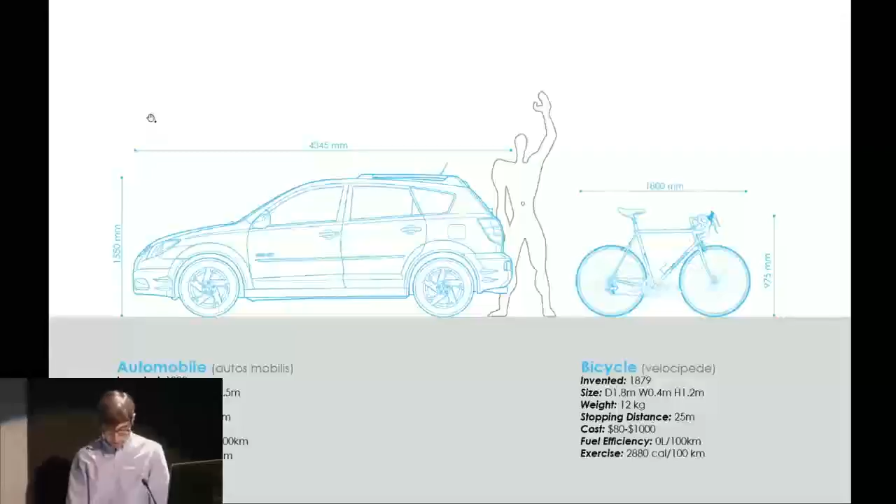The bicycle holds great potential in cities like Toronto, where it currently holds only 1 to 2% of the transportation modal share. Cycling eases traffic congestion, reduces pollution, promotes an active lifestyle, and contributes to a more vibrant civic life, all while being a fast way to navigate the dense urban environment.

A surge in interest in cycling has spread across the globe quickly in recent years as people begin to acknowledge the many benefits that cycling can bring to urbanites. Despite this growing excitement, an ingrained bias towards the automobile in North American planning has created an attitude which resists a cycling culture.

Political policy changes clearly reveal the potential for the bicycle. The massive population growth in the Greater Toronto Region has caused serious transportation troubles. In order to promote a more sustainable lifestyle, the government has developed a long-term strategy for the future of urban development and transportation.

Examining Toronto Council's strategic plan, the City of Toronto's official plan, as well as the Government of Ontario's Places to Grow Act, reveal an emphasis on densification and intensification in order to reduce commute times and curb sprawl. This more compact lifestyle lends itself perfectly to bicycle-based transportation.

The Big Move, published by Metrolinx in 2008, emphasizes the need for a multimodal transportation system, where the bicycle can pick up a much larger percentage of the trips within the urban core. The alignment of the bicycle's qualities with the region's long-term vision provides great motivation for actively and aggressively promoting its use.

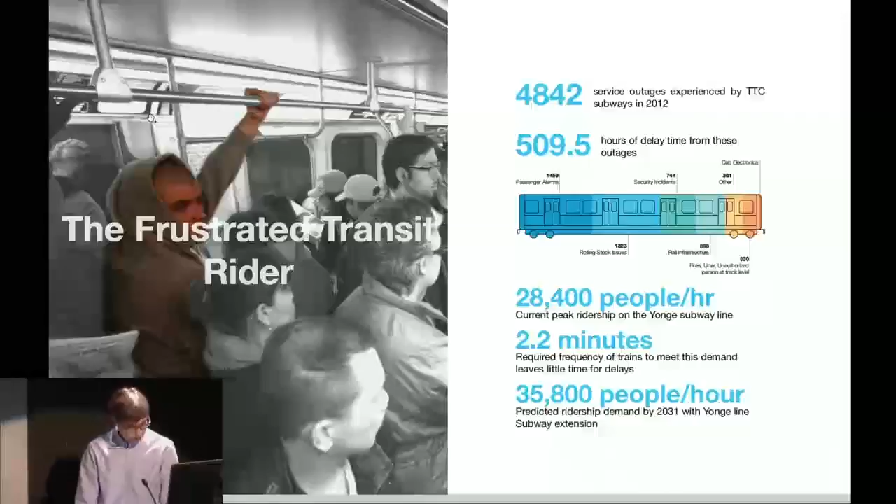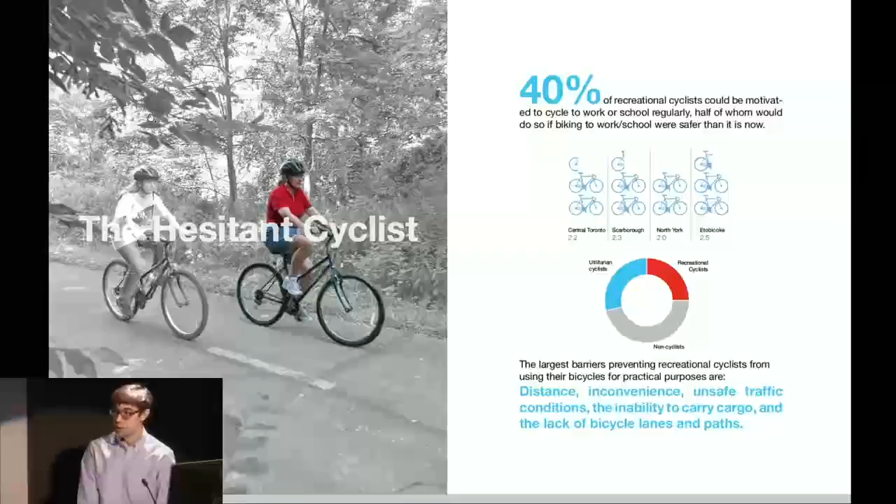The frustrated driver loses 170 hours per year to traffic congestion. The frustrated transit rider is faced with a delay-prone system that can hardly keep up with rush hour demands. The hesitant cyclist feels that commuter cycling is far too dangerous on streets filled with fast-moving traffic. And finally, the long-distance commuter is often left at Union Station far from their final destination.

Building a strong cycling culture involves a multifaceted approach which addresses infrastructure, policy, and cultural perception. In order to draw the frustrated commuter to the bicycle, city officials must target strategies which make cycling appealing to the average person. I have found 3 key motivating factors for enticing the potential cyclist: safety, convenience, and experience. These motivating factors are fundamental in analyzing the success of cycling projects and the design of new cycling infrastructures.

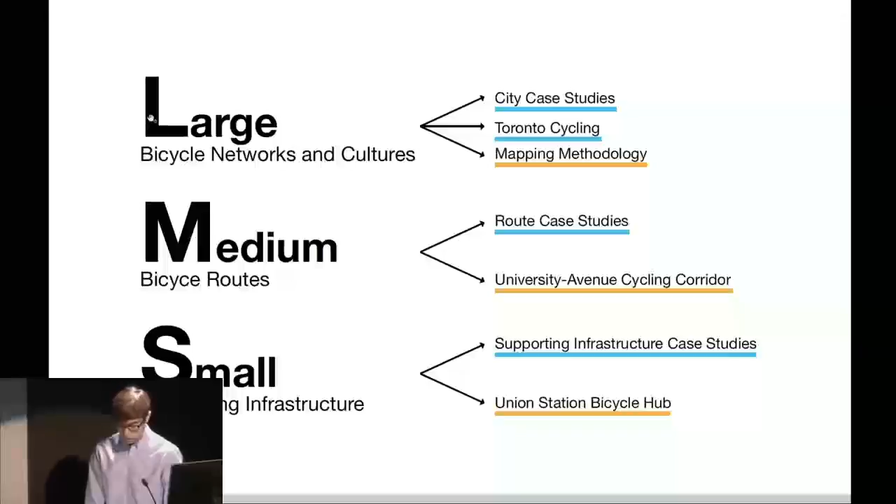Through this presentation, I will take you through an investigation of urban cycling at 3 different scales. An analysis of precedents at each scale is used to develop a design strategy for generating a cycling culture in Toronto, beginning with a mapping analysis methodology, then proposing a new cycling catalyst corridor, and finally a new vision for a multimodal bicycle hub at Toronto's Union Station.

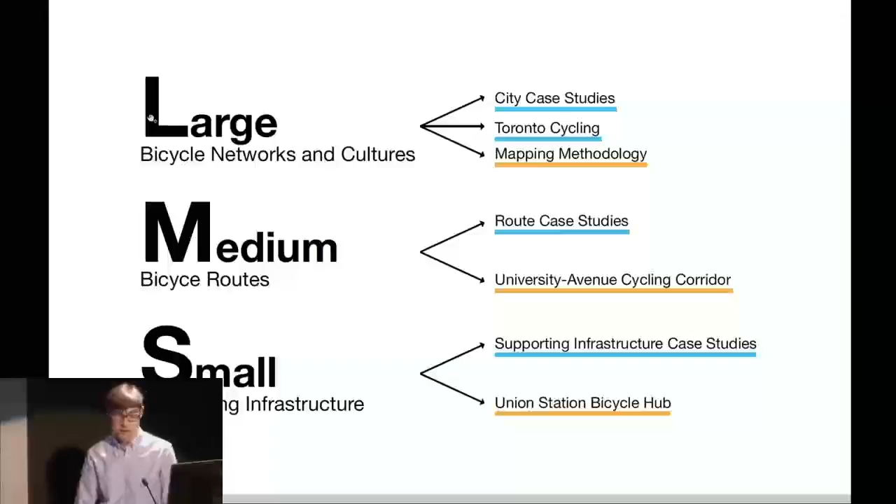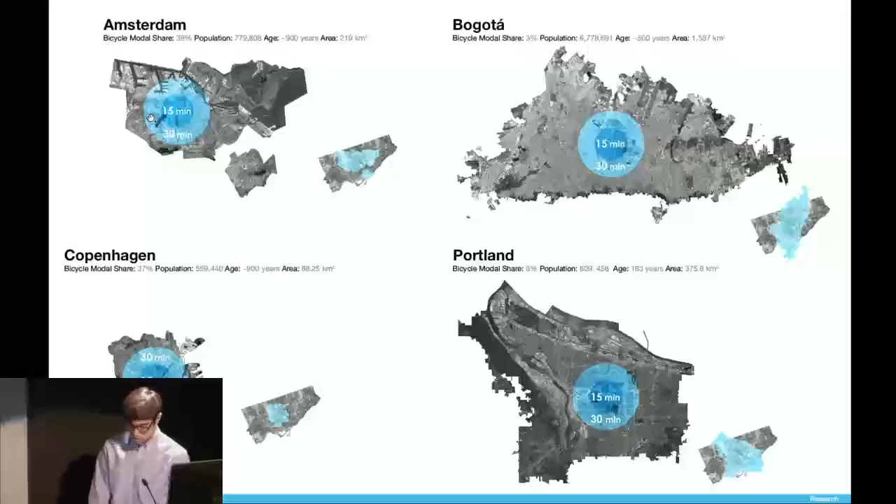We begin at the largest scale by examining bicycle cultures and networks. Much can be learned about building a cycling culture in Toronto by studying international cycling cities. These cities include those that have long embraced the bicycle, such as Copenhagen and Amsterdam, as well as cities that have in more recent history been strongly promoting cycle use, such as Bogota and Portland.

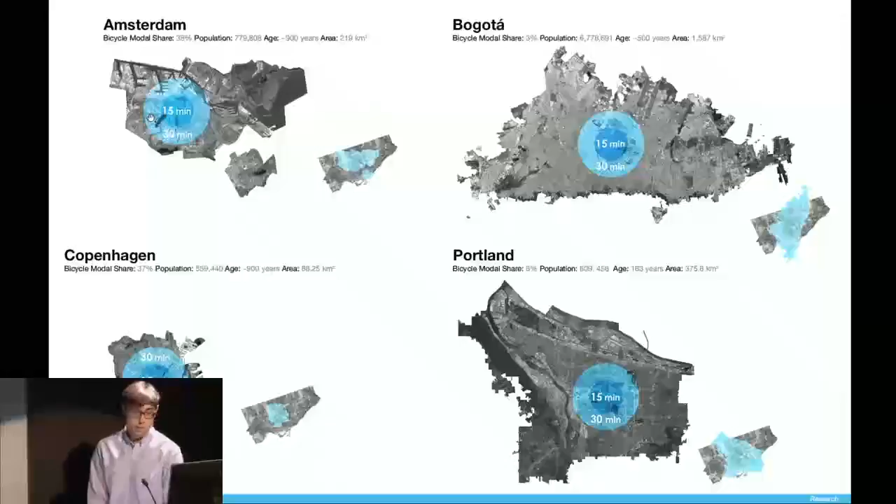In the interest of time, I will not go into great depth on each of these cities, but rather share some lessons I have learned that can be applied to generating a cycle culture in Toronto.

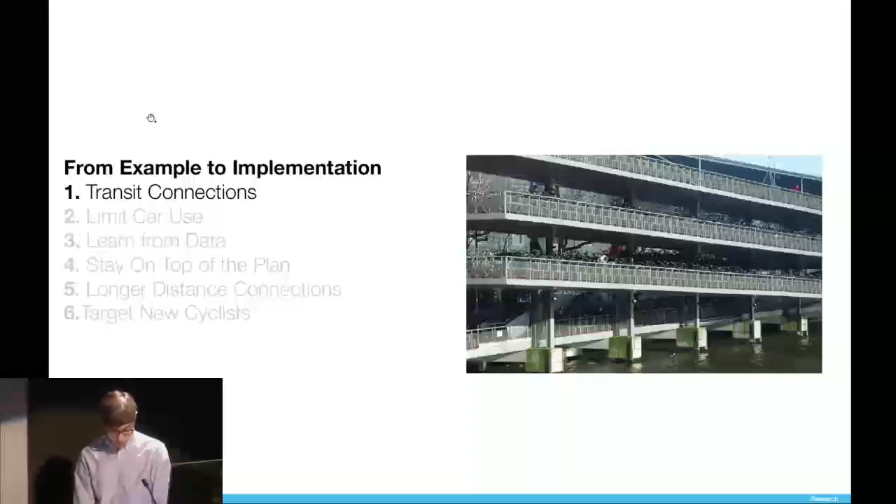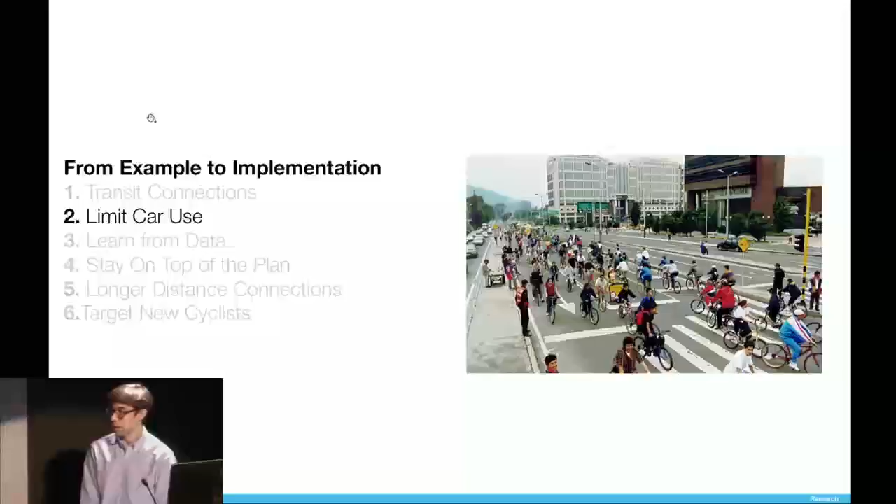Successful implementation in Copenhagen and Amsterdam have shown that transit connections encourage the multimodal commute and make cycling accessible to a much larger portion of the population. Bogota has had much interest holding car-free Ciclovia days on Sundays and holidays, and Copenhagen and Amsterdam have gone further, creating whole districts that are only for pedestrians and cyclists.

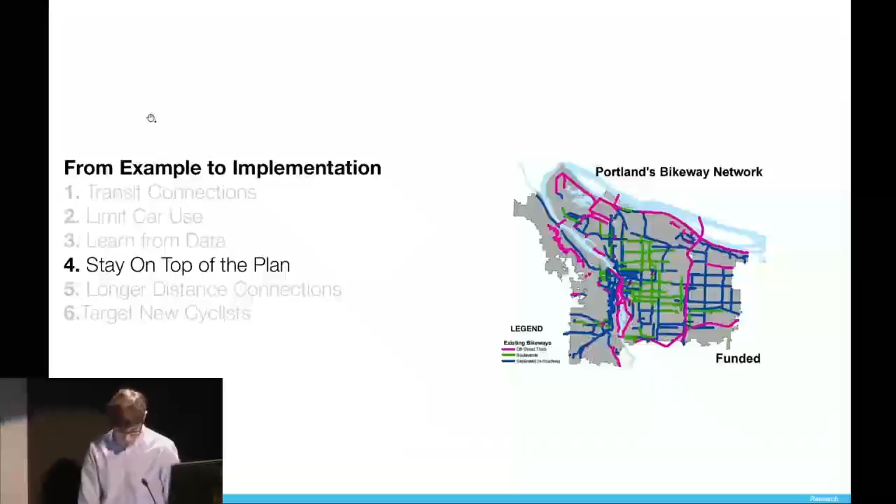Copenhagen has developed a practice of monitoring the use and effects of cycling infrastructure and applying the results to improve its cycling strategy. These cities regularly update their cycling targets and write annual progress reports on their bicycle plans.

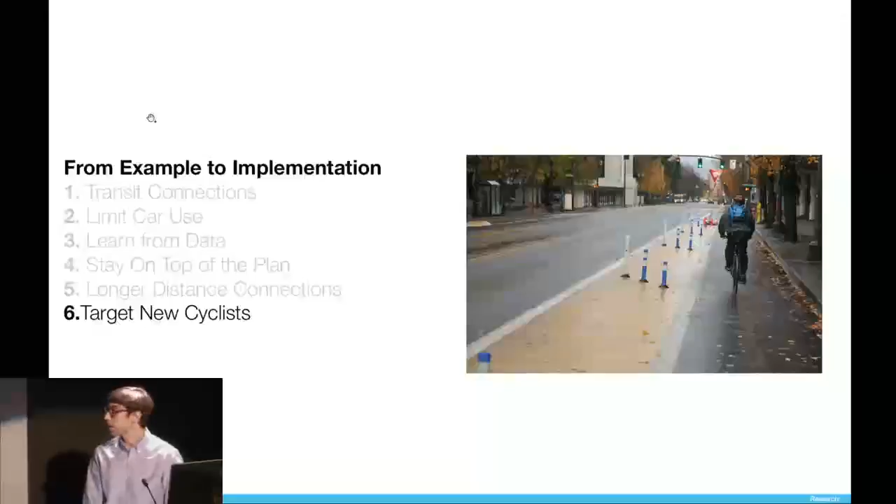Cities like Copenhagen and London have also built uninterrupted cycle highways connecting the inner suburbs to the jobs in the downtown core. And finally, cycling infrastructure should not look only to inspire the confident cyclists, but focus primarily on the hesitant cyclists who require separation from traffic.

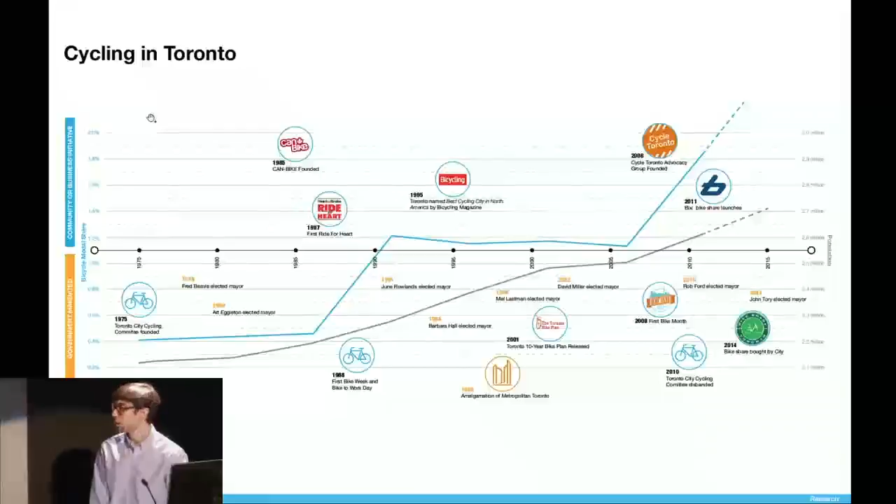Toronto joined the bicycle revolution quite early, establishing the Toronto City Cycling Committee in 1975, which began many great initiatives. In 1998, major political change came to the city with the amalgamation of the 6 municipalities of metropolitan Toronto. This meant that the more car-dominated communities, which were less suited for cycling, now had to share tax dollars and political decision-making with the more cycle-friendly downtown parts of the city.

Nevertheless, in 2001, the city revealed an extensive and ambitious 10-year cycling plan with the goal of doubling the number of cycle trips by 2011. The most impressive part of the plan was a 1,000-kilometer bikeway network, creating a comprehensive 2-kilometer by 2-kilometer grid which would stretch across the entire city.

Despite this grand vision, today only a small portion of these new routes and cycling have been built, and the cycling modal share remains at less than 2%.

In 2011, the plan was adjusted to focus mainly on off-road trails, building new on-road connections only where studies had been done to show that there was little impact on traffic and where the community was fully embracing the plans. Despite this limited approach, the potential of cycling has emerged in the downtown core.

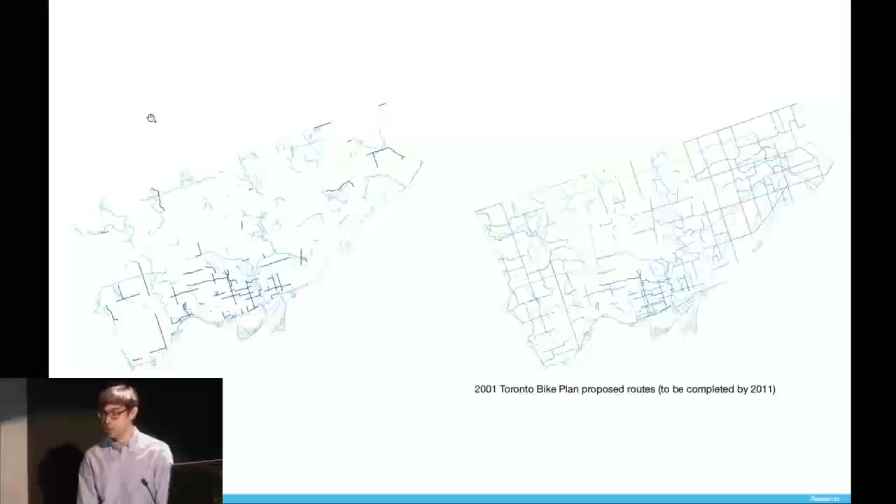In September of 2013, Cycle Toronto counted nearly equal numbers of cars and bicycles traveling along College Street during rush hour, proving that building infrastructure does bring cyclists. More recently, with the pilot project of the Bloor Street bike lanes, we've seen even in these winter months a 38% increase in cyclists along that route.

The Toronto Bike Plan's downfall appears to lie in its broad sweeping approach. This citywide strategy was unable to generate continuous political and financial support across the city's wide range of neighborhoods.

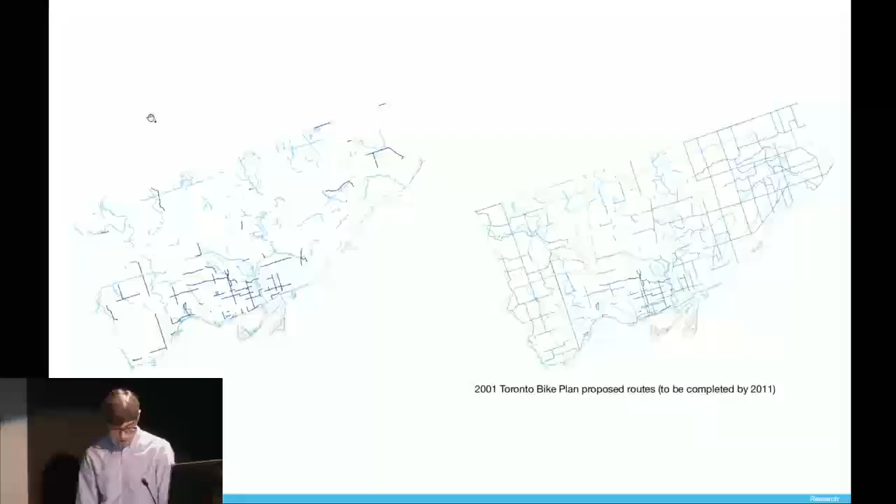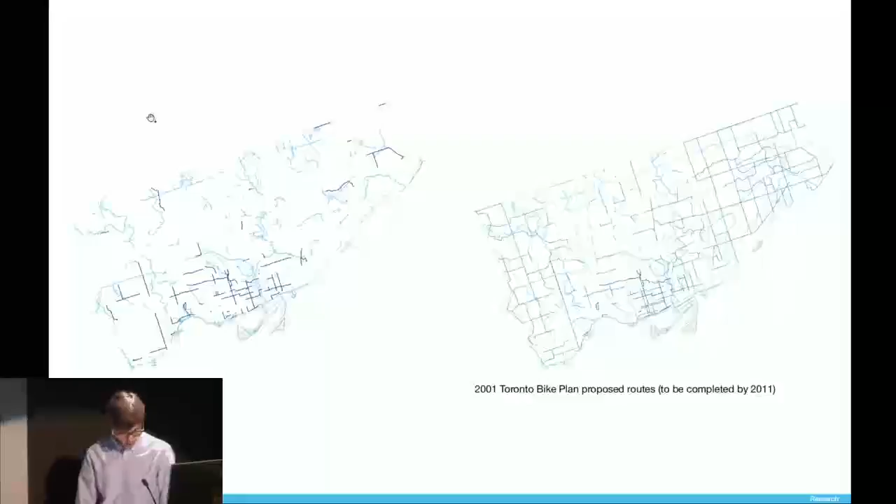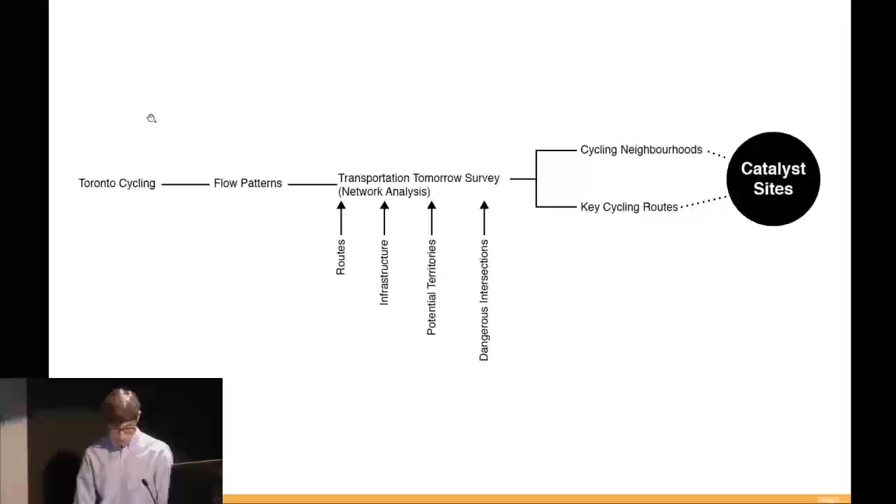I believe instead that community-specific demonstration projects have the potential to build excitement and public interest. Once one successful, well-designed project is implemented, it can act as a catalyst, spurring interest for further development in other areas of the city. This research strategy seeks to overcome the shortcomings of Toronto's bike plan by studying specific patterns of bicycle use in order to locate potential sites and routes for these catalyst projects.

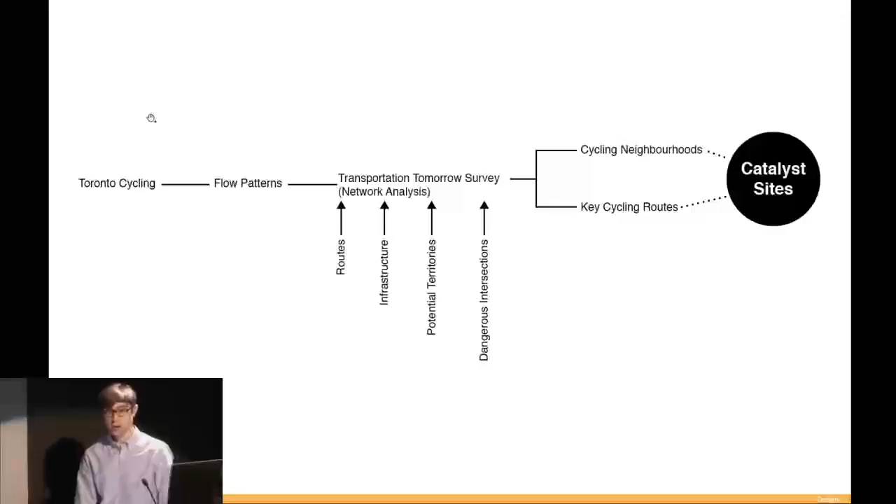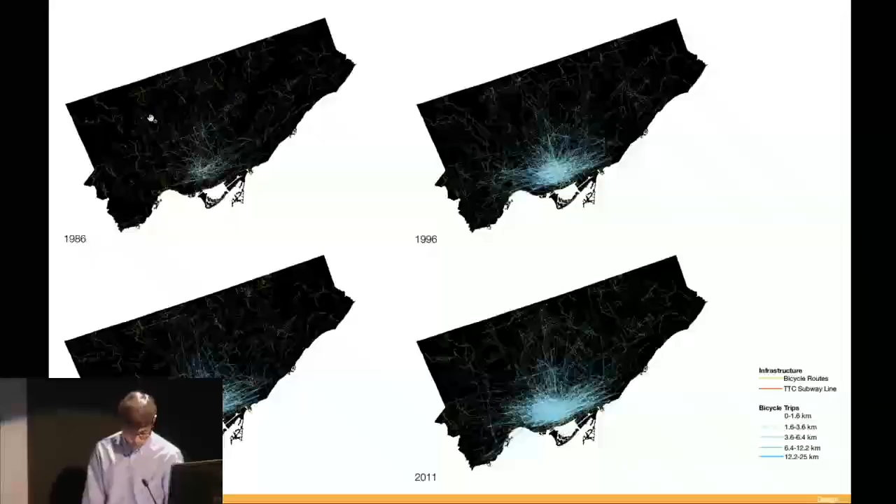The method follows 3 steps in analyzing trip data that I gathered from the Transportation Tomorrow survey. The first step involves analyzing patterns of bicycle traffic. These 4 maps show the growth and spread of cycling over the last 30 years in Toronto.

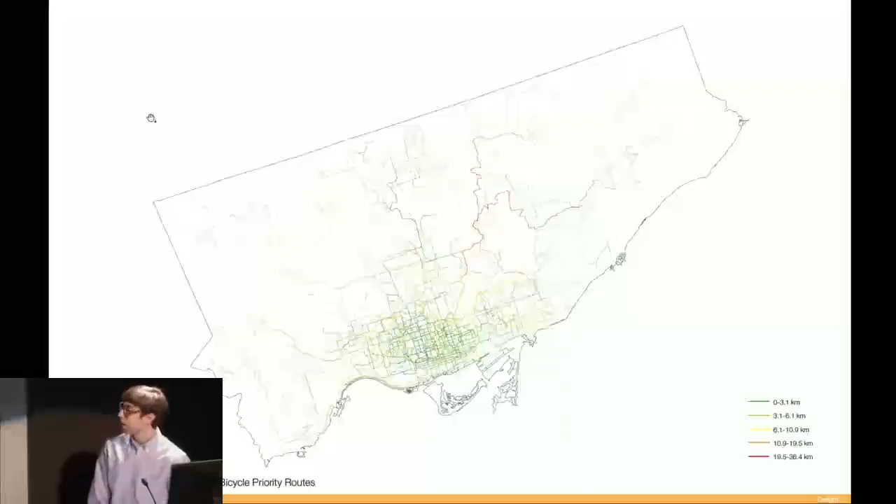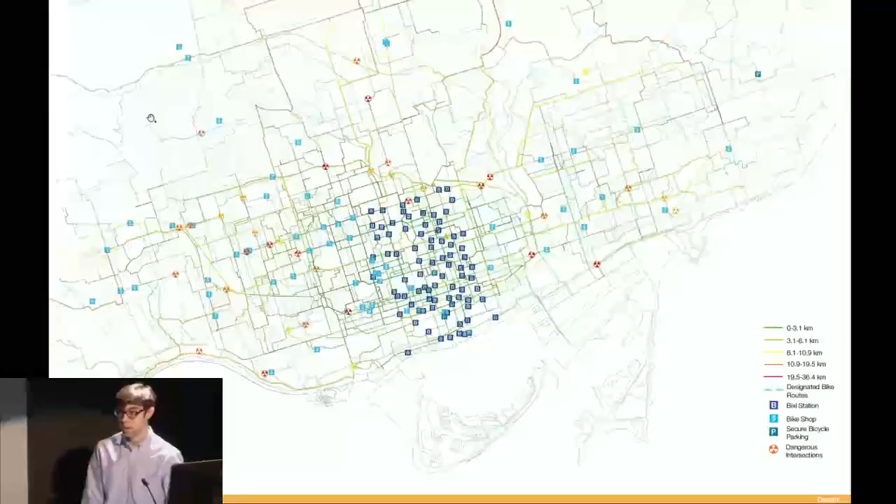Next, a GIS network analysis was used to simulate routes from the cycling trips recorded in the latest Transportation Tomorrow survey, prioritizing the routes designated bicycle routes. These routes were then overlaid with existing cycling infrastructures and amenities, as well as intersections with reported high rates of cycling accidents, to try to find relationships between the two.

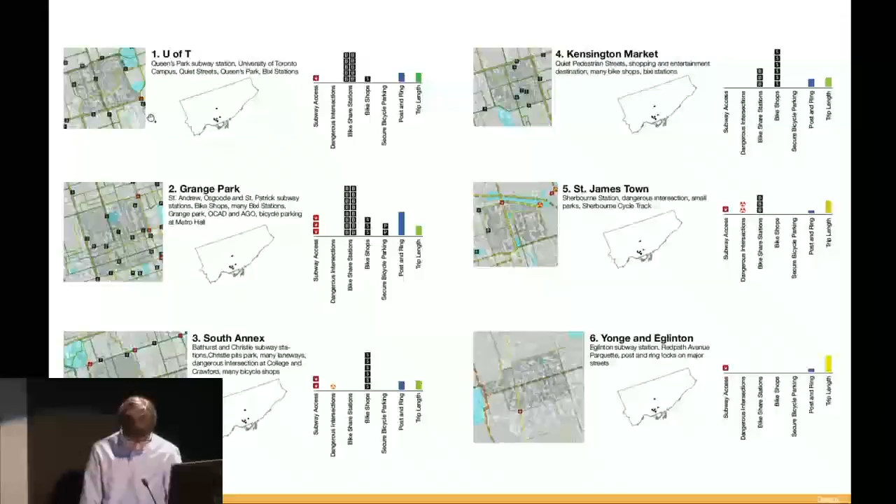The second step of the analysis went on to identify and investigate neighborhoods in which the highest number of bicycle trips originate and terminate. The final step was to identify and investigate routes with the largest volumes of cycle traffic.

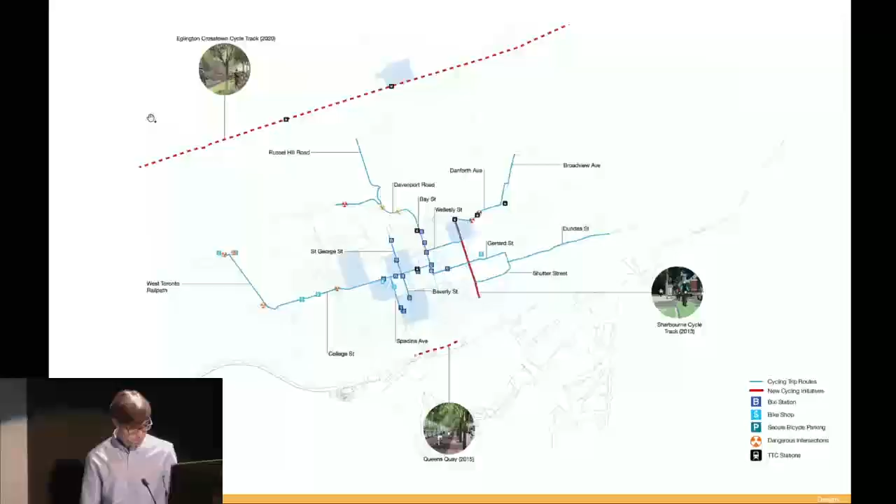One identified shortcoming of these GIS network analysis was that the cyclist paths are generated based on a computer algorithm. As such, they do not account for all the nuanced decisions that come from an intimate knowledge of the city. A GPS tracking study becomes a valuable tool for addressing these deficiencies.

Using data from the City of Toronto cycling app, which was launched in May of 2015, I was able to create this map to verify my network analysis results. This data revealed the busiest cycling routes, but also visualizes less obvious shortcuts and hidden routes, which become part of the mental map of every cyclist.

Moving on to the next scale allows for the applications of these mapping studies in choosing a route for further development.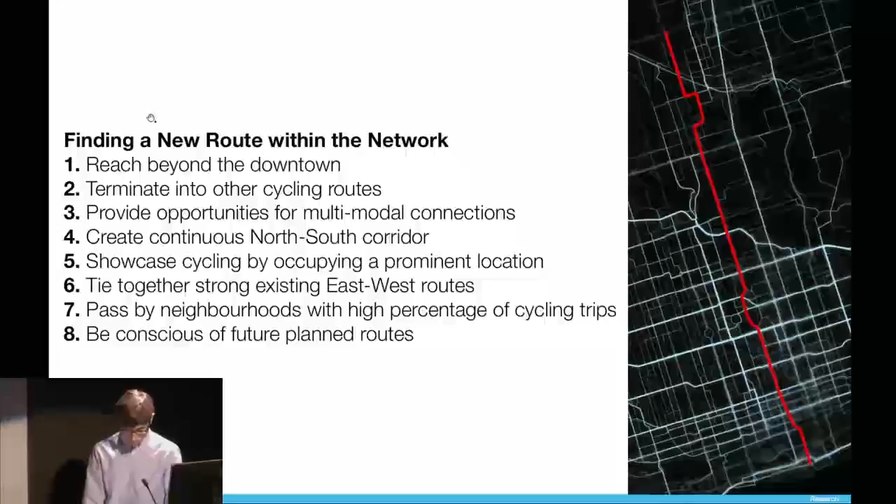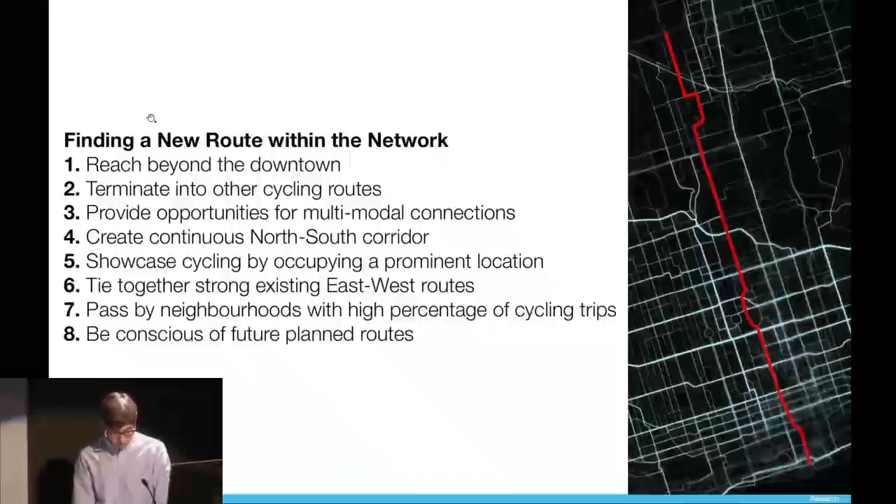My mapping research reveals the importance of the following criteria in choosing the location for an iconic cycle route with great potential to draw new cyclists. The route must reach beyond the downtown core, terminate into other cycling routes, provide opportunities for multimodal connections, create a continuous north-south corridor, showcase cycling by occupying a prominent location in the city, tie together strong existing east-west corridors, pass through high-volume cycling neighborhoods, and be conscious of future planned routes.

These criteria have led me to choose the Avenue University corridor as a new proposed test project.

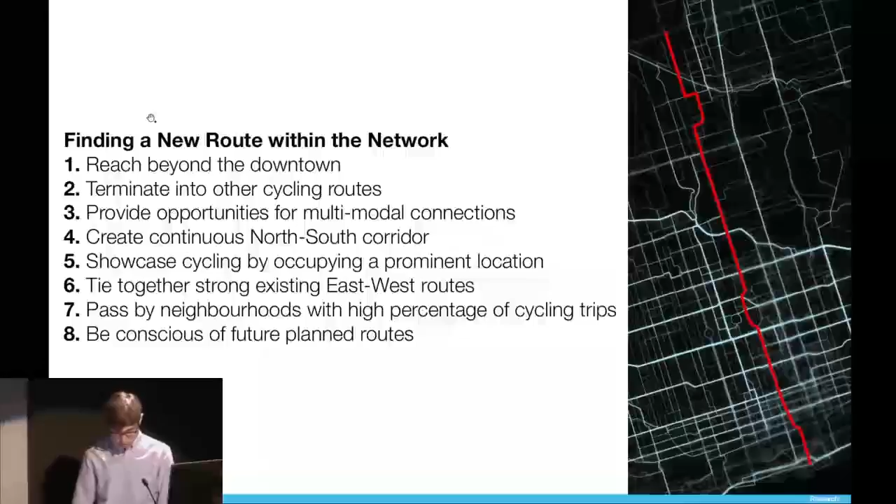The study of exemplary cycling paths provides much insight for the design of a new route in Toronto. The following routes have all boosted cycling levels in their respective cities. The Lisbon bicycle path played a major role in revitalizing the city's waterfront. The Queen's Plaza Bikeway provides a safe and enjoyable route on a once dangerous, heavy traffic street. The London Cycle Superhighways connect residents in the suburbs to their jobs downtown, and the Minneapolis Midtown Greenway transforms a disused rail corridor into an important commuter route.

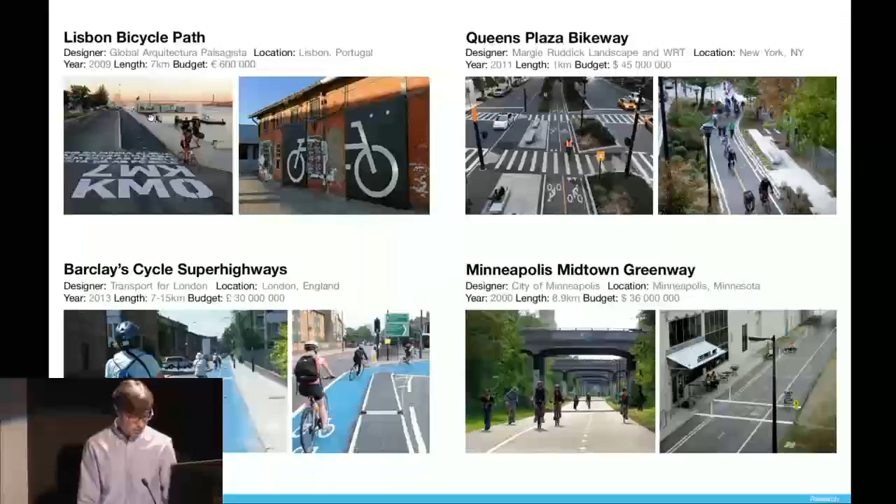The following design lessons can be applied to the new route which I propose for Toronto. A cohesive branding strategy can help tie together the experience of the route. Rather than utilizing traditional street signage, unique wayfinding adds excitement while having a bolder, more noticeable presence. The Lisbon bicycle path uses large text painted on the ground to identify distances and nearby destinations.

A cycle route is more attractive when it is carefully stitched into the fabric of the neighborhoods through which it passes. The Minneapolis Midtown Greenway provides well-marked connections to existing destinations and transforms the path's appearance to relate to the identity of the adjacent neighborhoods.

Areas in which to sit and relax or to engage in other activities add to visual stimulation to the cyclist while providing destinations along the route.

A cohesive branding strategy can help tie together the experience of the route, as seen in the London Super Cycle Highways with their continuous band of blue paint, or in the Lisbon bicycle path with its repeated painted graphics and text. Planting and green space have a calming effect and provide people with a contrast to the often hard textures of the urban environment.

The Queens Plaza Bikeway and Minneapolis Greenway show how a cycle route can also function as a linear park. And finally, unique design adds a sense of novelty and thrill to a route. The value of design can be seen in the thoughtful implementation of infrastructure, such as signage or bicycle racks, as well as in the larger scale landscape and public art projects.

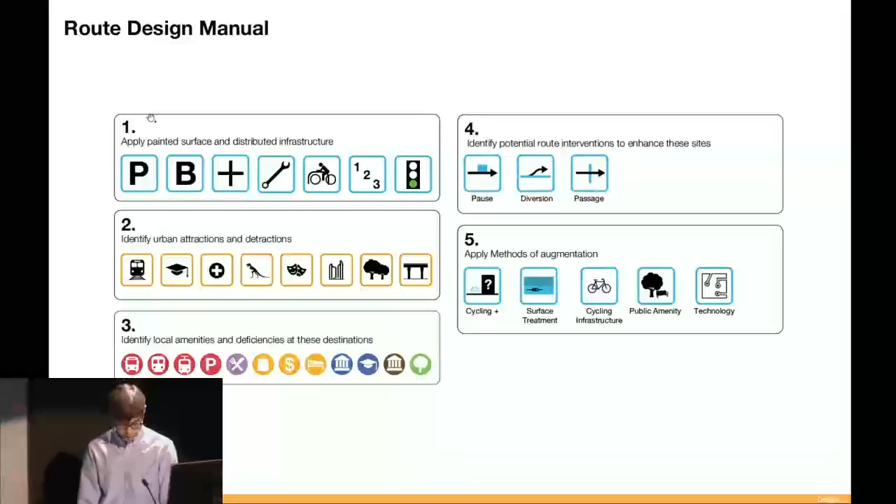From my research, I have developed a 5-step manual for designing a cohesive and connected route with the ability to attract new cyclists. Such a route provides a safe, comfortable, and enticing experience, while at the same time connecting cyclists to the urban context. The foundation of this route strategy begins with the best practices standards of a ribbon of separated cycle lane enhanced by supporting infrastructures including parking, bike shares, repair stations, and safe intersection design, as well as green wave signals synced to the speed of the bicycle.

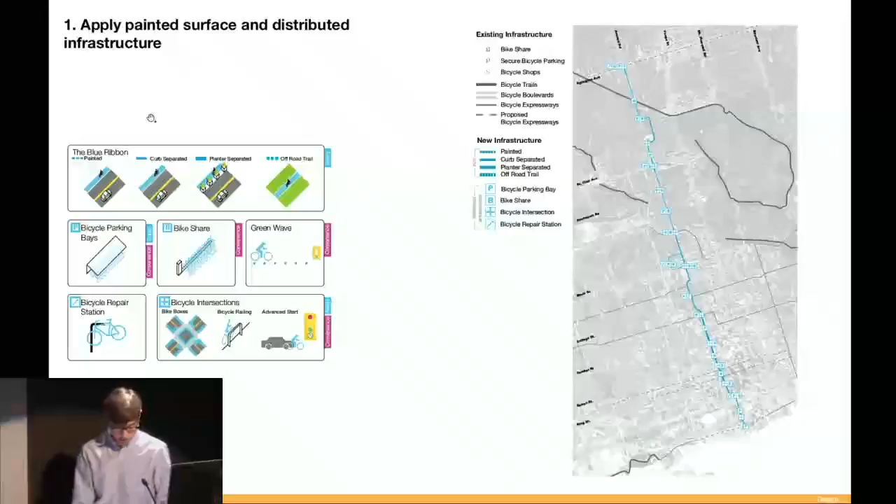In order to successfully attract new cyclists, the route seeks to move beyond this standard cycle track typology through a tighter integration with the community.

In order to place a cycle route in its broader urban context, an identification of existing destinations and attractions is conducted. Attractions include transit hubs, institutions, cultural destinations, and parks.

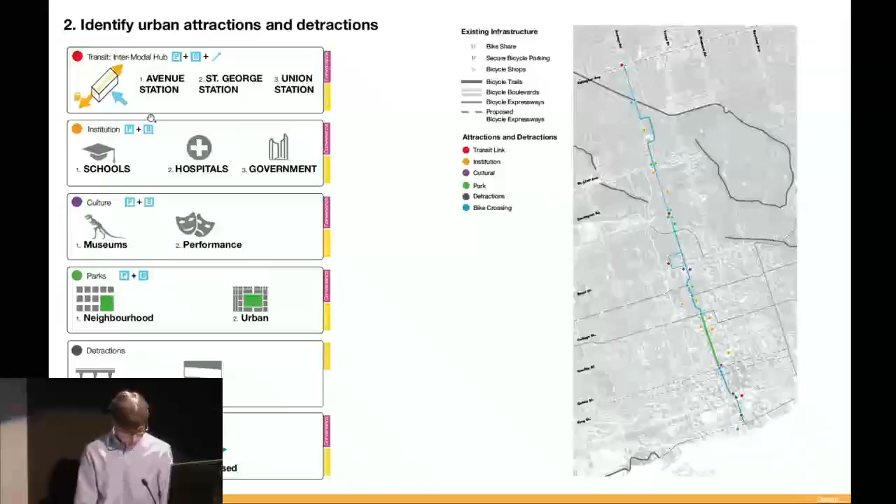A site analysis is conducted at each of these destination sites. Finding shortcomings in the site's amenities, as well as identifying the site's users, aids in determining how to best enhance the site experience. Cycling infrastructures can be bundled with other programs and amenities to create an environment which benefits cyclists and pedestrians alike, while simultaneously raising public awareness for cycling.

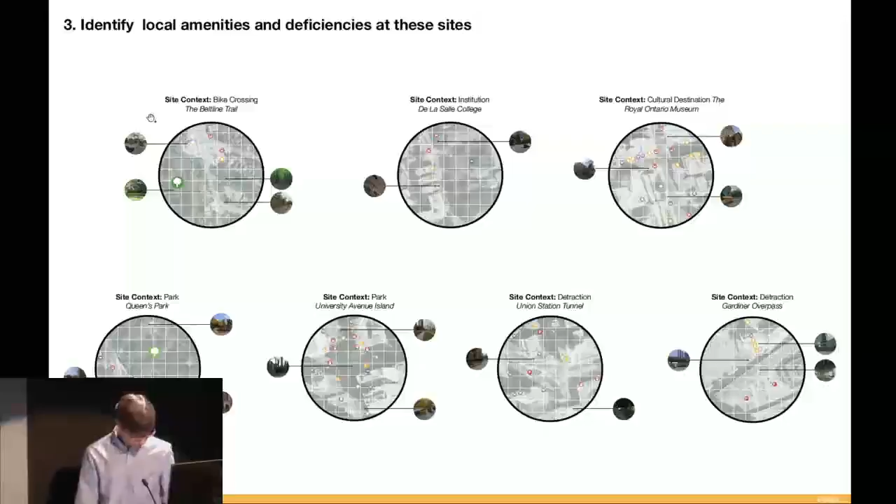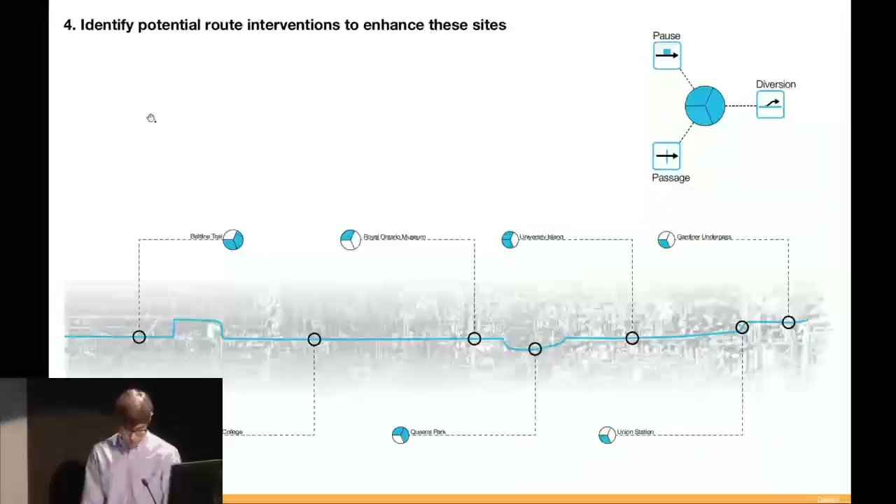A close investigation of these sites reveals three categories of events which occur along the route's length. Moments of pause occur near clear amenities. Diversions act as forms of wayfinding, expanding the reach of the route further into the city. And finally, moments of passage refer to conditions and experiences which are meant to be had from the seat of the bicycle.

The following techniques are implemented at these moments of pause, diversion, and passage in order to enhance the cycling experience and tie these routes into the adjacent destinations. The technique serves to enhance the programs on site, improve cycling accessibility to existing amenities, and improve the quality of public space. First, Cycling Plus activities activate a site by adding new programs to attract both cyclists and non-cyclists alike. Surface treatments are meant to control the flow of cyclists on the route, inform other road users of the presence of bicycles, and demarcate zones where cyclists and pedestrians must intermingle.

Cycling infrastructures such as bike shares, sheltered parking, and repair stations make existing destinations more accessible to cyclists. Public amenities such as seating, planting, lighting, and signage improve the quality of public space with which the cycle route interacts. Finally, technological augmentations take the form of interactive elements along the routes which create unique experiences for cyclists.

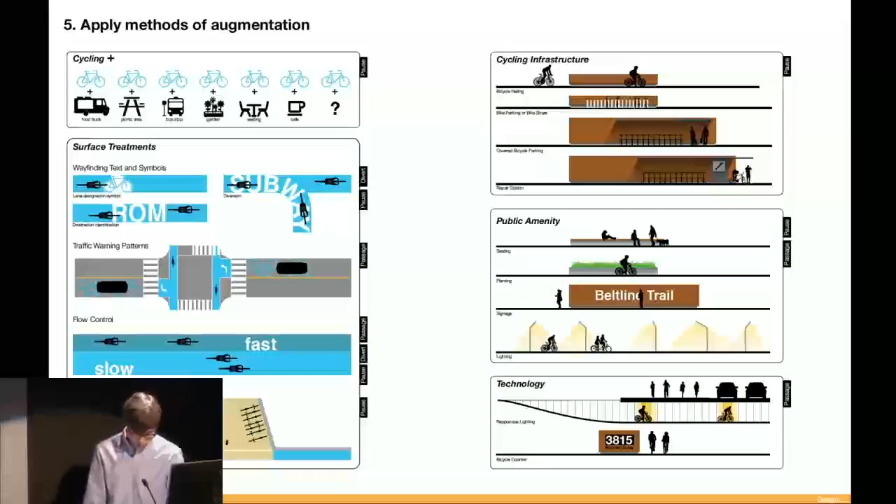I will now take you through the design of seven demonstration sites on the University Avenue corridor, beginning at the north and moving southward.

At this point, the route intersects with the Beltline Trail. Currently, this trail is poorly marked and has no crossing at Avenue Road. The design proposes a garden to mark the entrance of the trail and adjacent park. A new crossing allows cyclists and pedestrians to safely continue along the trail.

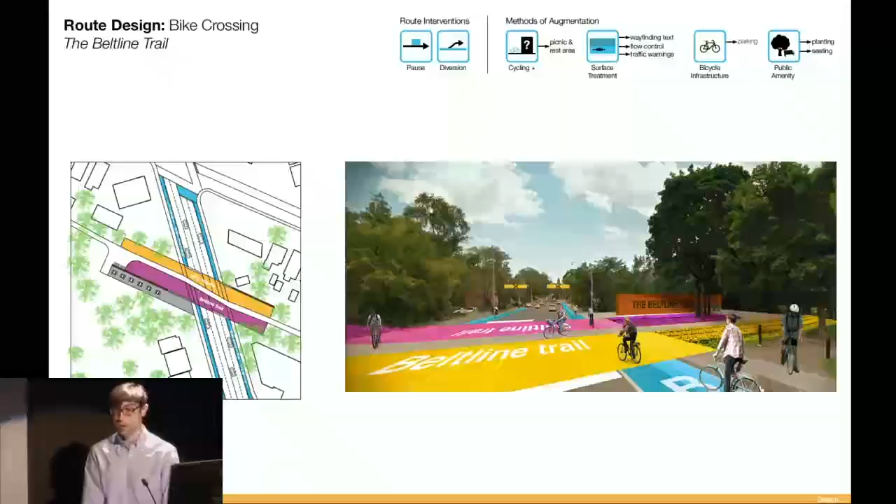At the crossing, paint is used to spill the colors of the garden onto the street. This bold move creates instant awareness for cyclists who wish to divert to the trail, and for drivers to keep an eye out for crossing cyclists and pedestrians. Additionally, a new trail sign forms a wind block for a small picnic area, encouraging people to stop and enjoy the park.

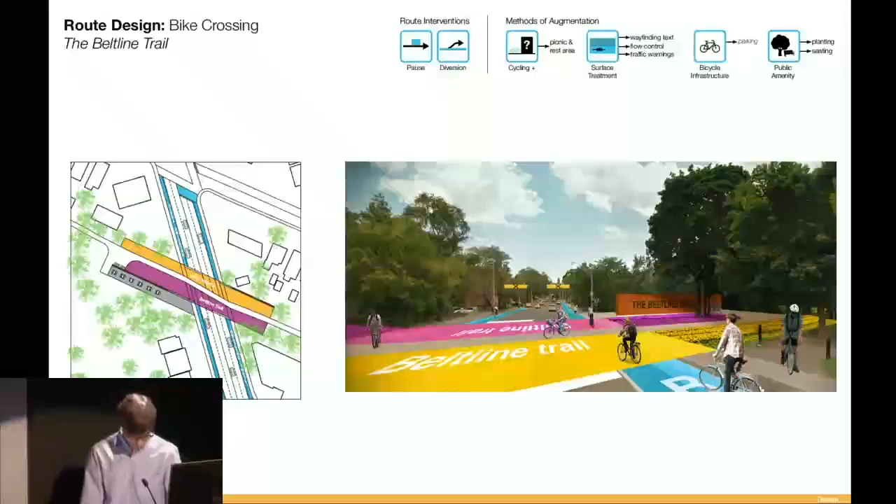At this next point, the route passes De La Salle College. Encouraging students to cycle to school, sheltered bicycle parking and a bike share station are provided in a new plaza at the front of the school grounds.

The nearby bus stop is integrated into the bicycle shelter, giving students a place to wait protected from the elements. New contrasting pavement reaches across the road, heightening drivers' awareness of the crossing and directing cyclists coming from the north or the west.

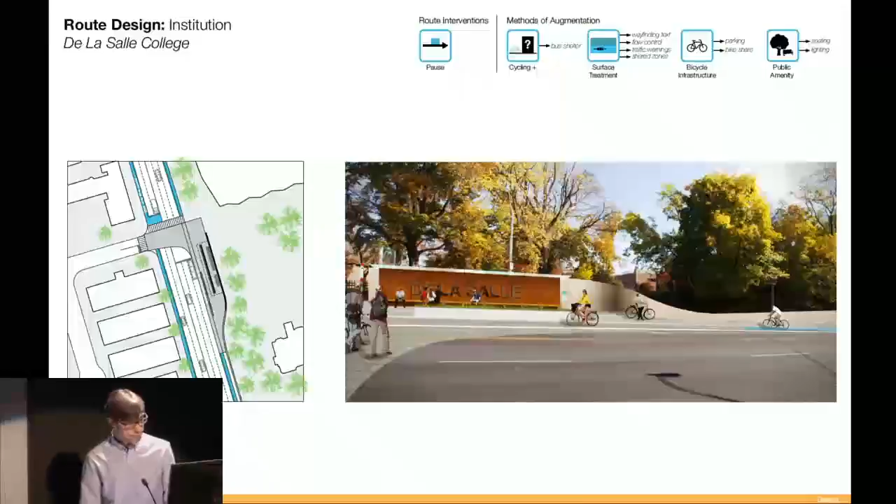Here the route passes by the Royal Ontario Museum. The new design enhances the public space by adding a landscaped lawn with new plantings, as well as new public seating, which is currently lacking in the area.

A public bike parking station and bike share are provided, encouraging visitors to ride to the museum. This site also demonstrates safe intersection design with bicycle boxes, advanced signals, and bike lanes painted through the intersection.

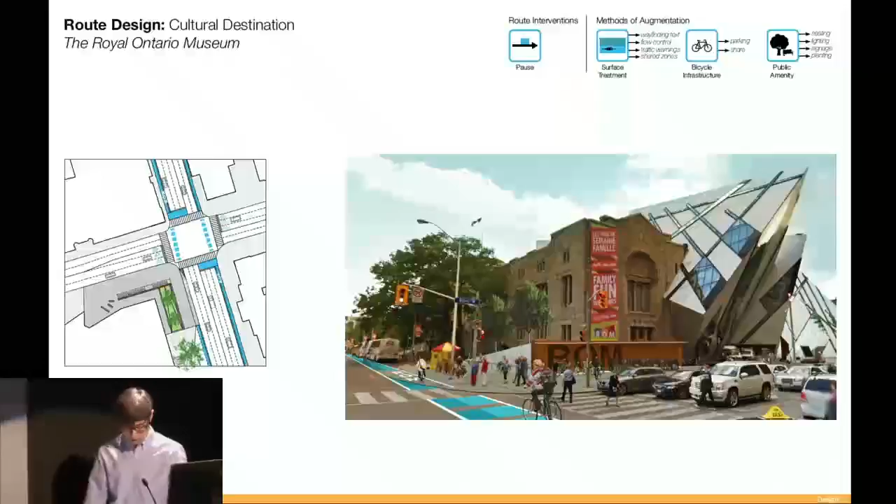At this point, the route passes through Queen's Park. The park is home to a series of monuments, but is primarily a place of passage. The design adds a new destination to the park. A new public square emerges in the southwest corner, featuring an outdoor cafe and bicycle repair shop. Passing cyclists can stop to have their bike tuned up or join a repair workshop.

At Wellesley Street, the route contains a diversion towards U of T, one of the most popular cycling destinations in Toronto.

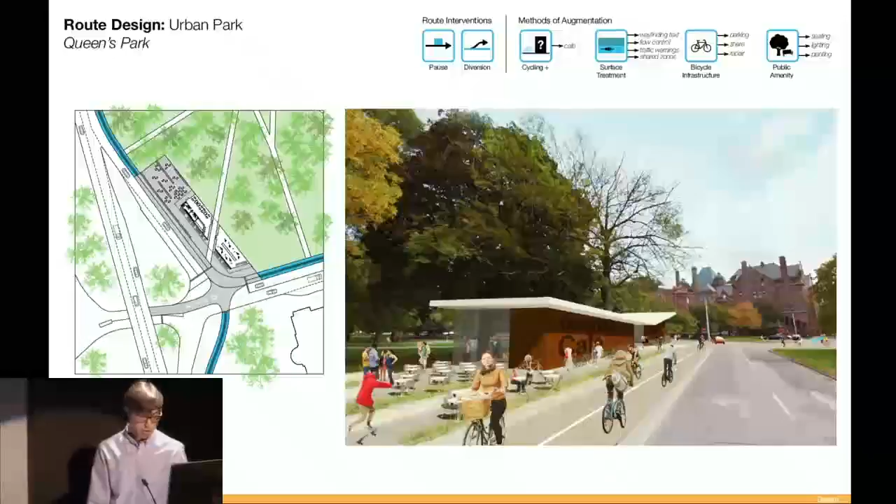After passing around the Legislative Building at Queen's Park, the route runs down the University Avenue Island. This underutilized space provides the opportunity for a high-volume bicycle path. Tree canopies create a natural tunnel which cyclists ride through.

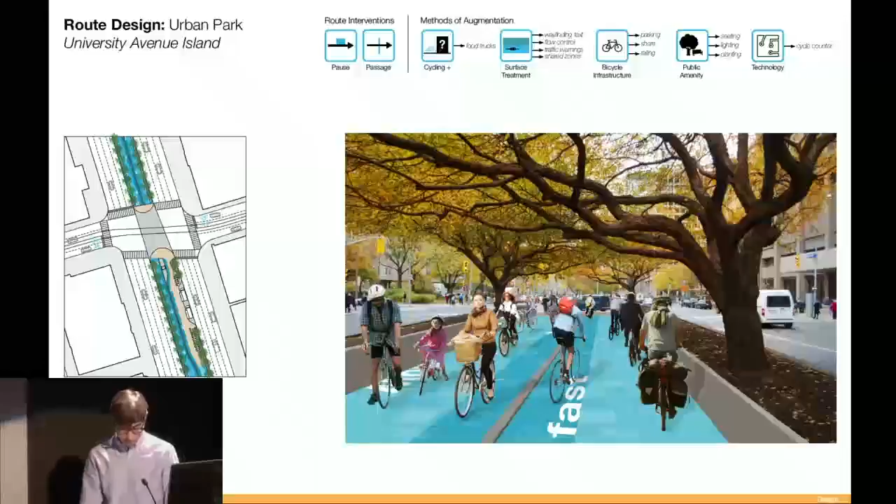The space is further activated by a food truck stop and seating area. This neighborhood has much office space, but few restaurants, so this addition provides a much-needed amenity.

Finally, when the route approaches Union Station, it descends underground to bypass the busy Front Street intersection, entering into a new underground bicycle parking station. To contrast the feeling of descent, the tunnel is brightly illuminated and features a lighting installation which traces the cyclists as they descend into the station.

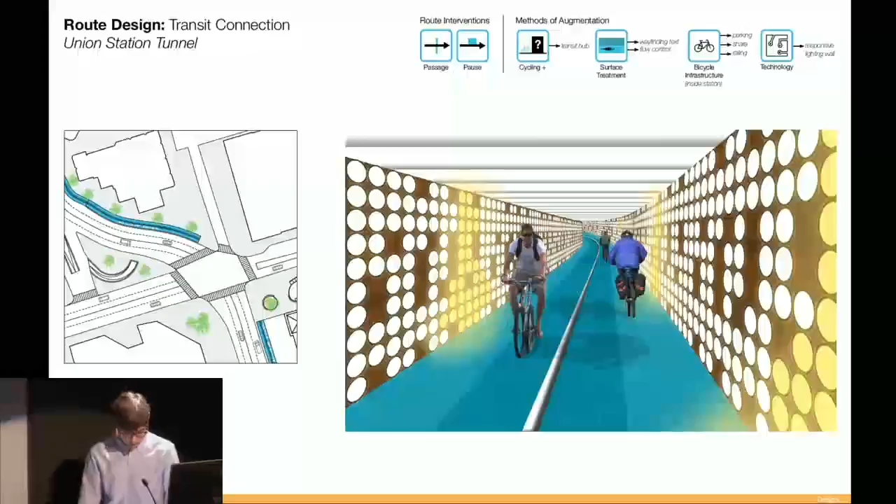Now moving on to the smallest scale, we look at concentrated supporting infrastructures, which are major infrastructure projects that occur at precise locations to draw large volumes of people to the route. There are three main types of these supporting infrastructures.

First are transit integrated hubs, which act as gateways for cycling for entire regions. Next are mass bicycle parking stations, which can be paired with these transit hubs or also located at compact commercial and employment districts.

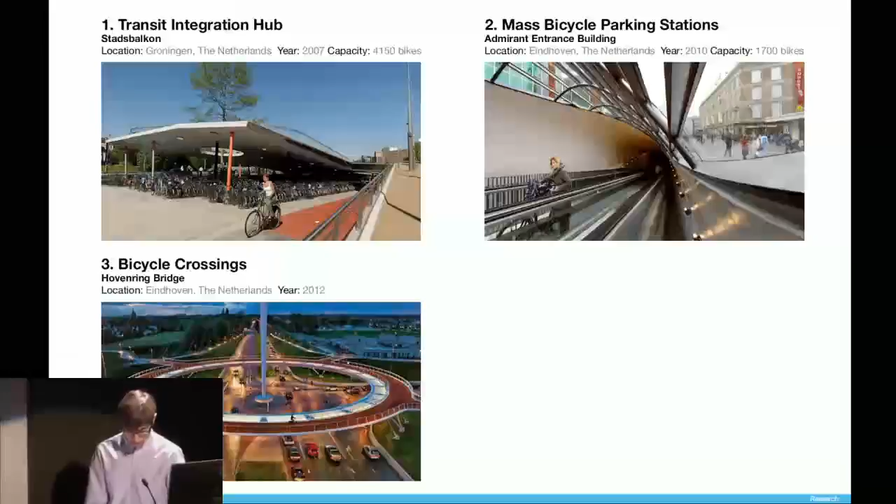Finally, bicycle crossings traverse major obstacles in the urban fabric, such as major highways, railways, and bodies of water. An investigation of successful supporting cycling infrastructure reveals the following strategies, which can be applied to the design of a new cycling hub at Union Station.

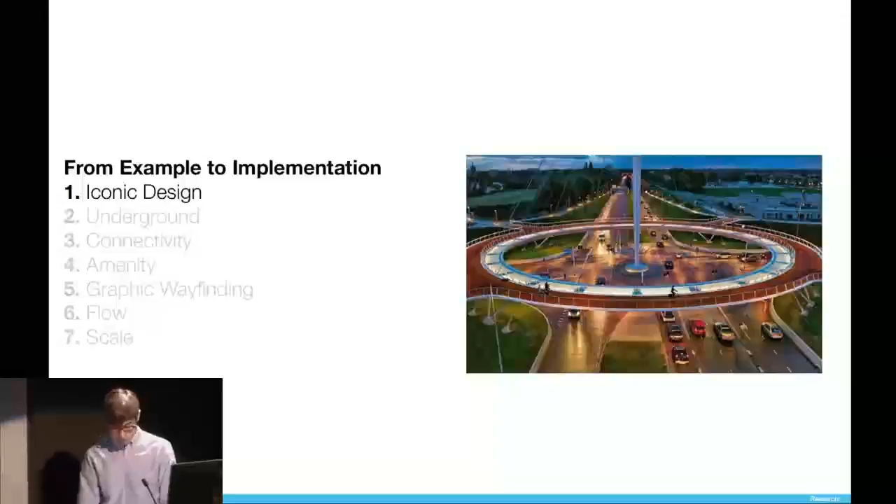An iconic, highly visible design can act as a form of advertising for the facility and for cycling. Putting parking underground is useful where space is limited and frees up the ground plane for pedestrians.

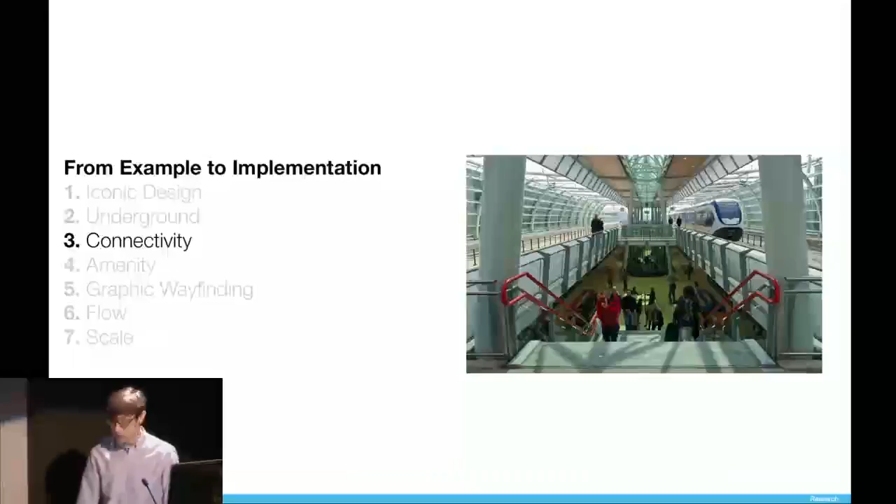Direct access should be provided to the trains and buses from the bicycle parking facility without having to go back outside. The facility should provide additional amenities such as bike rentals, bike repair stations, and public washrooms.

Parking areas should be well marked and organized, either with color or graphics, in order to aid users in finding their bikes.

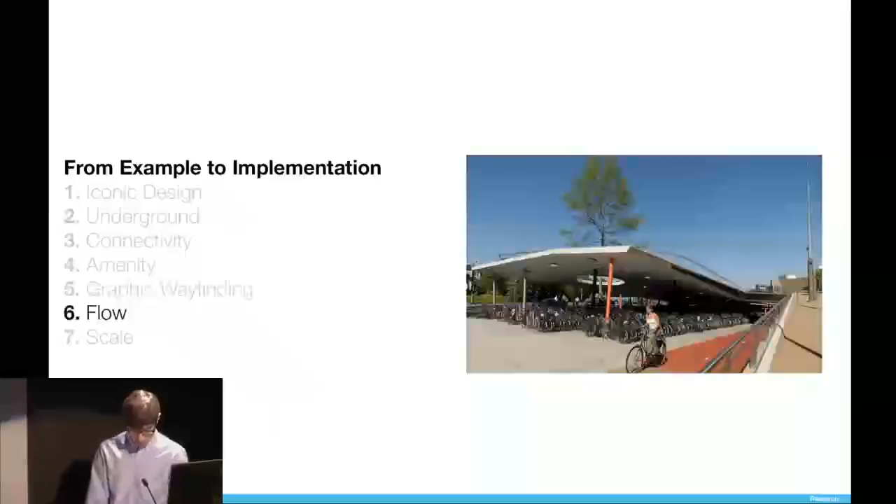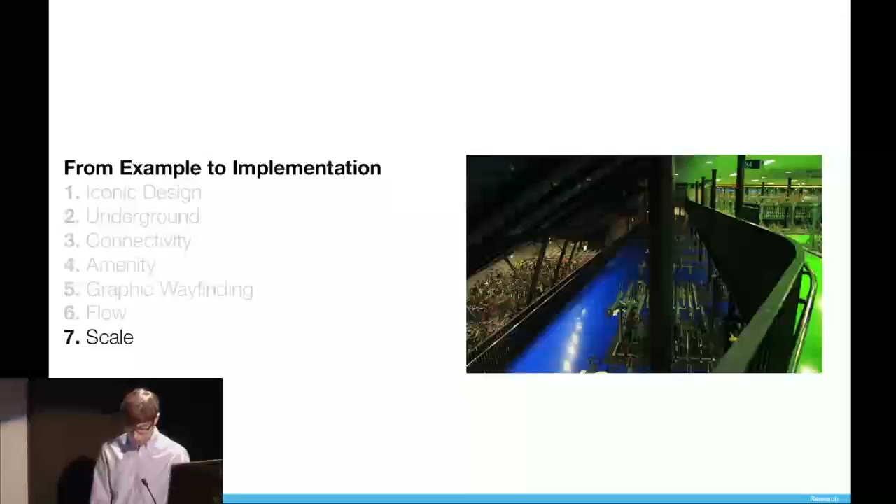Cyclists should be able to ride directly from a bike path into the parking facility and out again. And finally, it has been proven that free, high-capacity parking areas are much more effective in encouraging people to cycle than smaller parking facilities which require a paid membership.

Union Station has been undergoing and continues to undergo an $800 million renovation over the past few years. Despite all the improvements, little thought has been put into significantly incorporating the bicycle. In 2011, there was a small parking area towards the back of the station, which requires membership and has no direct access to the TTC or GO concourses.

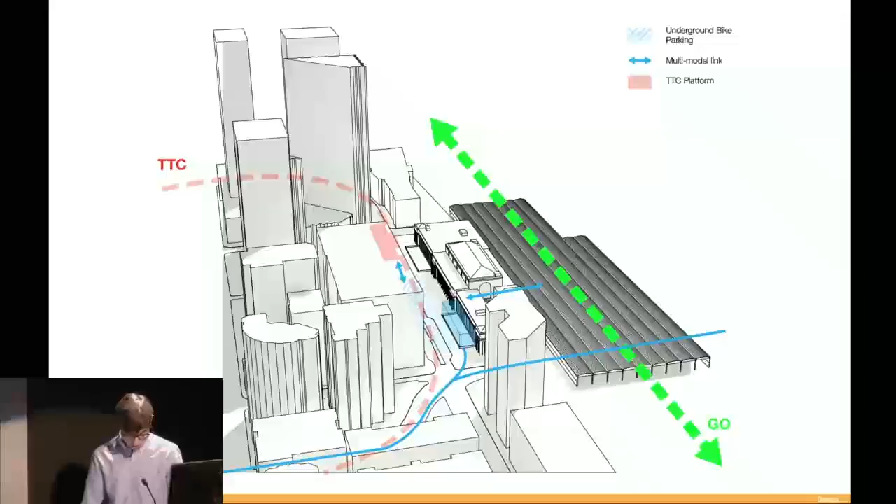This new proposal seeks to reimagine how the revitalization project could have incorporated the bicycle. The design gives cycling a much more prominent position in order to boost the image of cycling and encourage commuters to incorporate cycling as part of their daily routine.

The station connects seamlessly with the new University Avenue bicycle route with a ramp tunnel. To conserve valuable surface space, the bicycle parking is located below grade with a direct connection to the subway concourse to the east and the pedestrian moat to the south.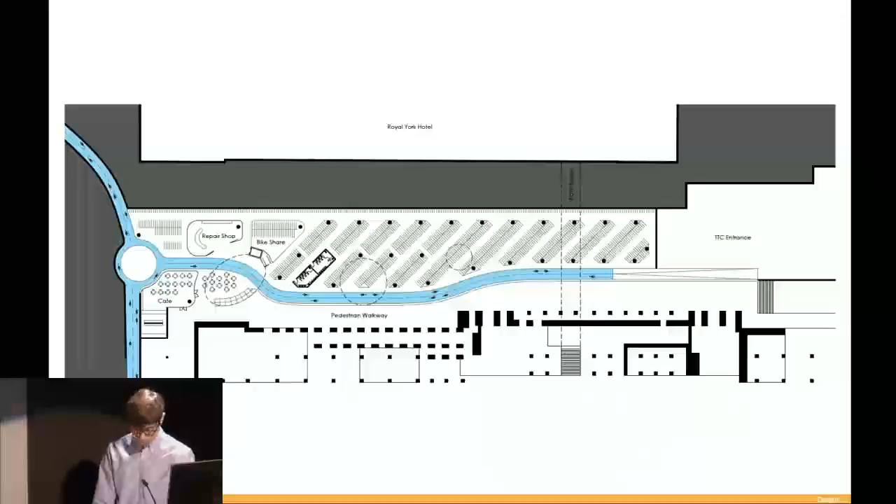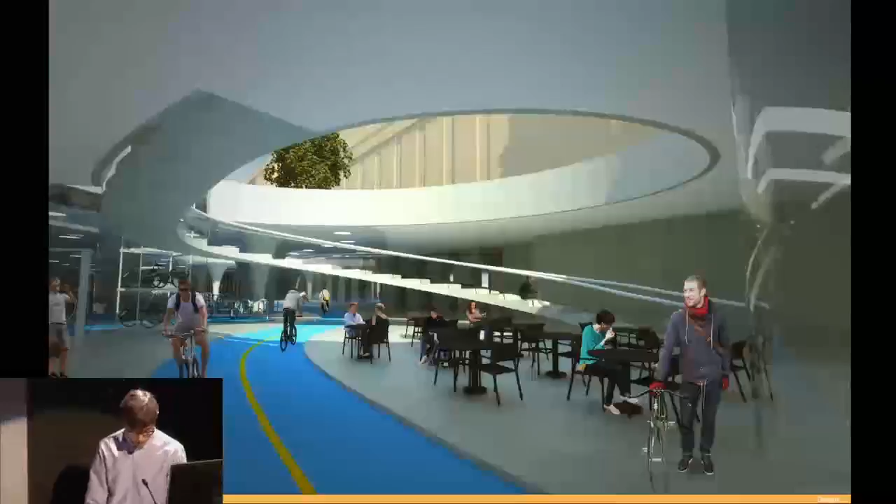Round skylights bring natural light into the parking area and give life to the pedestrian plaza above. The facility is activated by a cluster of programs surrounding a central pedestrian staircase.

A cafe allows commuters to mingle and grab breakfast or a snack, and a repair shop allows commuters to quickly top up their tires, patch a flat, or leave their bicycle for a tune-up while they're away at work.

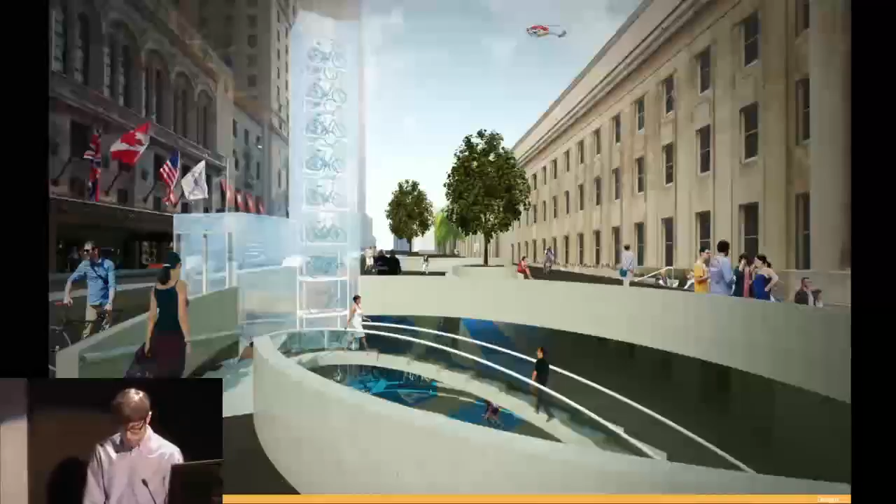Also located at the bicycle hub is the city's largest bike share station, complete with a bicycle dispensing tower which acts as a beacon for cycling in the city and a form of branding for the station.

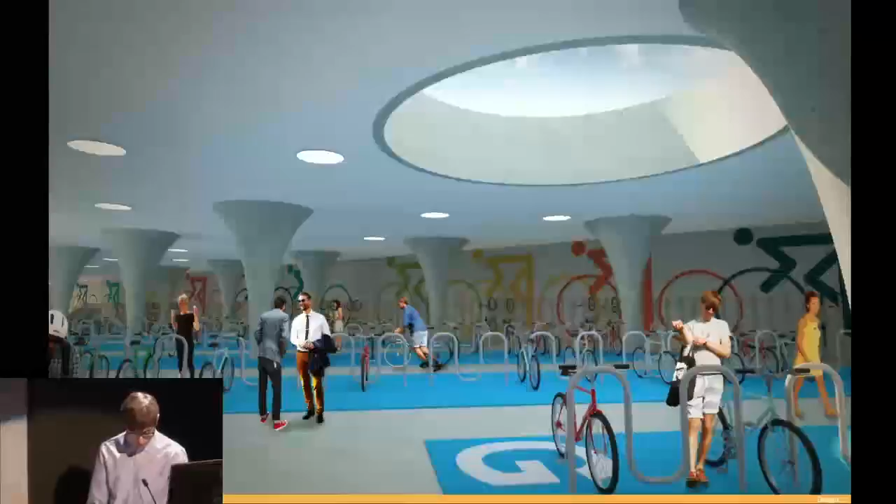The vast bicycle parking area with space for 1,200 bicycles is organized by clear, graphically marked parking zones and enhanced by bicycle-themed wall art. The new hub caters especially to the long-distance commuter.

Walking through Union Station's pedestrian moat, the GO train rider is greeted by a vista of bicycle parking, with cyclists effortlessly coasting by. Whether they leave their own bicycle securely parked at the station or use the bike share, they are liberated with new transportation possibilities.

The bicycle hub becomes a nexus of activity, a lively urban space activating the plaza above. It is a destination where people seamlessly transform between cyclist, pedestrian, transit rider, and back again.

The City of Toronto is at a point where making a major investment in the right places can set it on a path towards embracing cycling as a part of the everyday transportation network. Toronto can leap from simply maintaining the status quo to building a strong cycling culture.

My thesis presents a strategy that can be applied to all cities looking to reap the benefits of an increased cycling modal share. The focus of this strategy is to develop a deep understanding of cycling in the city through mapping and analysis, enabling the identification of sites that have significant potential to attract new cyclists through the construction of well-designed cycling infrastructures and amenities.

This design strategy targets specific areas which are deemed to have the largest immediate impact. While most cycling routes in the city are built as simple, painted lane markings, this approach uses design to elevate the vision of the bicycle route.

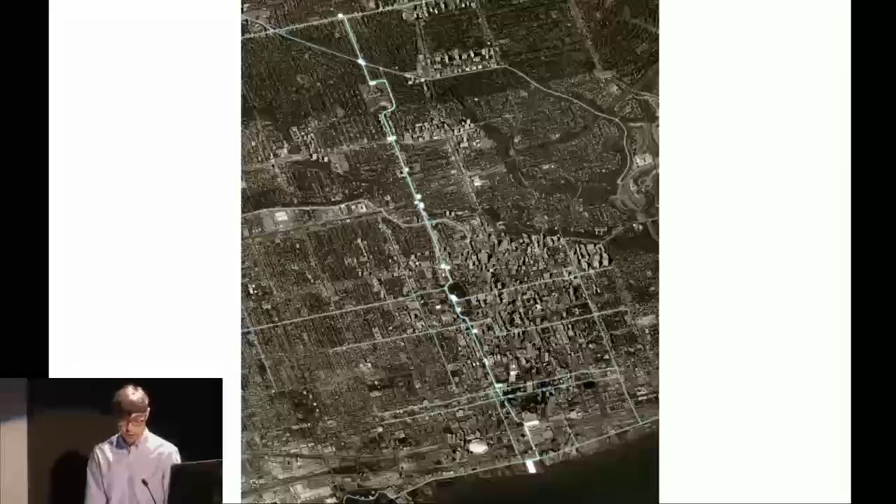The act of cycling is dramatized, transforming in the minds of potential cyclists from an unappealing activity to an irresistible experience. This route strategy transforms key arteries that can function as highlights within a larger cycling network.

The route reveals the potential of truly integrating cycling with the existing fabric of the city and represents a paradigm shift in North American cycle planning.

While citywide plans are important for supporting cycling in the long run, this bold, targeted approach provides the ability to jumpstart interest and excitement around cycling.

Over time, this excitement will transform into dedicated support and facilitate the expansion and enhancement of the rest of the cycling network. The growing network, spurred by these catalyst projects, will allow cyclists to travel safely, conveniently, and pleasantly through the city, which in turn will become a happier, healthier, less congested, and more attractive place to live.